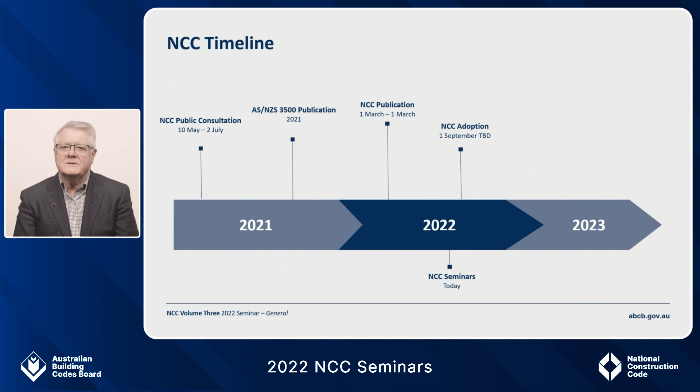Hopefully you all know that the 2022 PCA has already been published in preview mode and is available on the ABCB website. If you haven't already, jump on the website today and download a free copy. This preview has been released early to allow industry to become familiar with the changes ahead of the adoption of NCC. And of course, these seminar sessions are also intended to assist industry to become familiar with the changes to the NCC. The 2022 edition of the NCC is the biggest and most comprehensive update since inception.

And, in fact, there are still a couple of big decisions to be finalised. The main one is a decision on the proposed changes to residential energy efficiency. That decision is expected to be made by the building ministers before the end of August. We recognise the challenge that presents with the scheduled commencement of the NCC on 1 September.

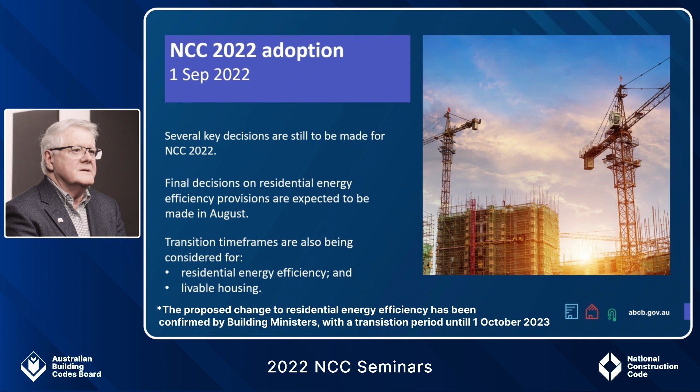We understand that the building ministers will also be considering transition arrangements that will delay the adoption of those provisions, and we have recommended that the adoption of the NCC should not be any earlier than October 1. As soon as we have more information and the building ministers have made a decision, we will let you know by sharing across our networks as widely as we can.

The first change I should mention is a change to the structure and the numbering of the NCC provisions. The NCC has a completely new referencing system for 2022 as part of our digitisation strategy for the NCC. The old referencing system wasn't machine readable or consistent across all volumes, so to enable digitisation across the three codes, the referencing system had to be updated.

Whilst this isn't a drastic change to the PCA, which moved towards this approach in the previous edition, this is a big numbering change for the BCA, and as I indicated, will bring all three volumes of the NCC into a consistent numbering structure. If you use the BCA for areas of work such as roofing, gutters and downpipes, you'll see some big changes here.

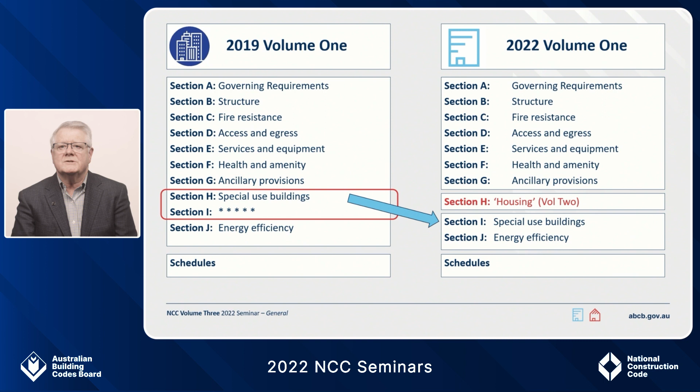When looking at Volume 1, there has not been a huge change. In fact, the only real change at this level for 2022 is that the special use buildings gets bumped into Section I, which leaves Section H empty for a housing section, which is contained in Volume 2. More on that in a moment. For Volume 2, things start to really change when you drill down into the parts.

For NCC 2022, the acceptable construction practice in Section 3 is picked up and moved into a new reference document, the Housing Provisions Standard. Think of this as being like a reference standard. It's not in the NCC, but is called up by the NCC. It's not our first reference document. We already have the three ABCB reference standards, such as the standard for construction in flood hazard areas.

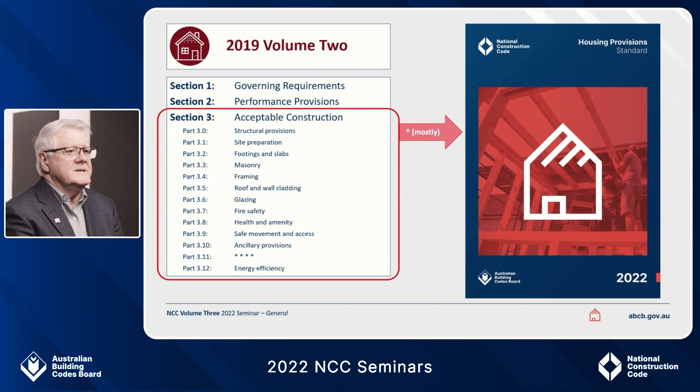So the idea of an ABCB standard isn't new, though this is our biggest move in relation to Volume 2. The numbering is broken into four key elements to indicate what area of the code you are looking at and the type of provision. In this example, you will see that the B indicates the section, B being the water services section of the PCA. The 1 indicates that it's part 1 of the section, which specifically covers cold water services.

The P indicates that it's a performance requirement, or if it was a D, it would indicate that it was a deemed to satisfy provision. And the last number indicates that it's the first clause in the provision. In this example, Performance Requirement 1, which is for cold water supplies.

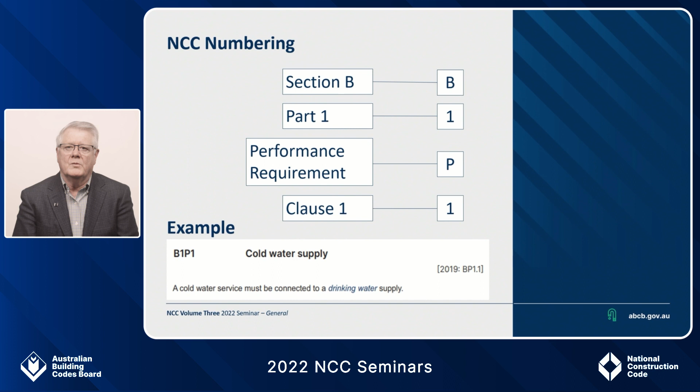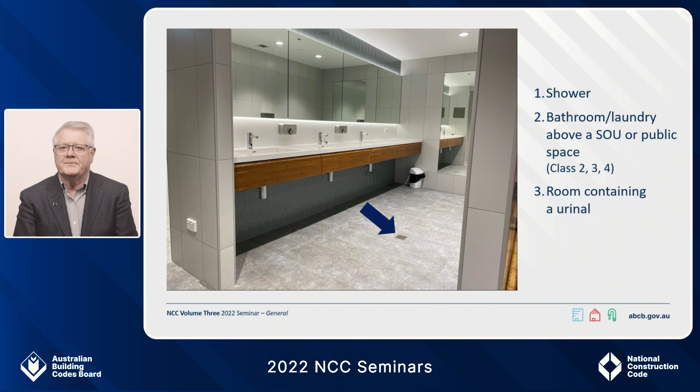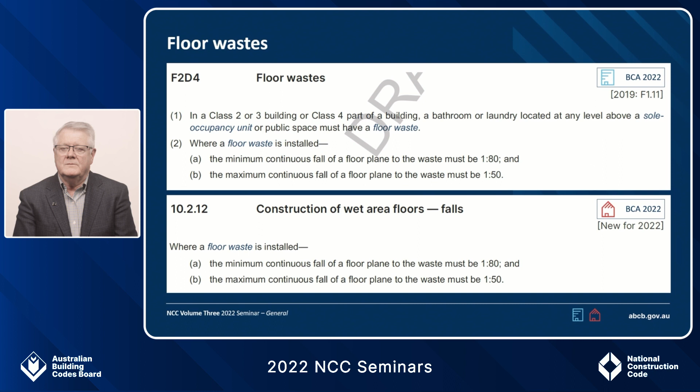After some major changes for commercial buildings in NCC 2019, building ministers decided the ABCB should develop enhanced energy efficiency provisions for residential buildings. This will be the first major stringency increase for residential energy efficiency in the NCC since 2010. Besides improvements for building envelopes, a whole of home approach will be introduced in the NCC 2022.

The whole of home approach is a holistic approach to assess the energy performance of a building and covers all of the key appliances as well as the building envelope. A key point for the plumbing sector in relation to these energy efficiency requirements is that they won't change current work practices for plumbers, but may be used to inform which water heaters are selected through considerations of the wider house design.

The NCC 2022 will be reducing the allowable lead content in plumbing products. Products which contain copper alloys and are intended for use in contact with drinking water will be required to have a weighted average lead content of no more than 0.25%. NCC 2022 will specify new requirements and will outline the transition period for this change, which I'll show you on the next slide. There are a few reasons for this change.

One consideration was for international practices. Australia is a small market on the global scale, and consideration was given to what is happening internationally to ensure that Australia does not create more stringent requirements than other countries. If this happened, this requirement would become a barrier to trade and the importation of plumbing products. As such, this change will align with the levels set by other countries, such as the USA and Canada.

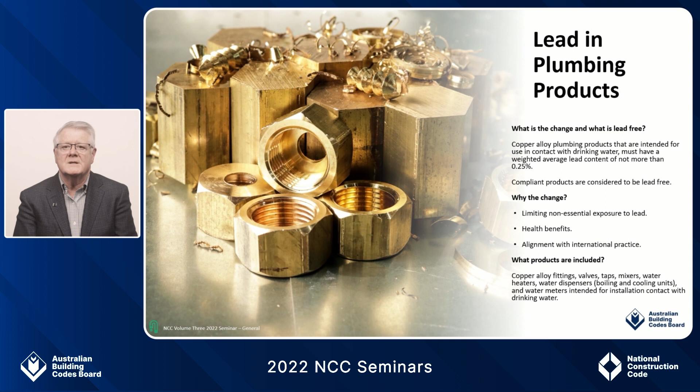The application of the lead-free requirements is limited to products containing copper alloy and are in contact with the drinking water. These products include items such as fittings, valves, mixers, water heaters, water dispensers, and water meters. I mentioned before that there will be a transition timeframe for the lead-free plumbing products. There will be a 3-year transition period to allow manufacturers and suppliers time to ensure that there is sufficient lead-free plumbing products in the market by the 1st of September 2025.

For now, there is nothing that needs to be done by the installer, but beyond the 1st of September in 2025, only lead-free plumbing products will be authorised for installation and existing products will no longer be able to be used. This is a big change for the industry, so we will talk more about this transition later on.

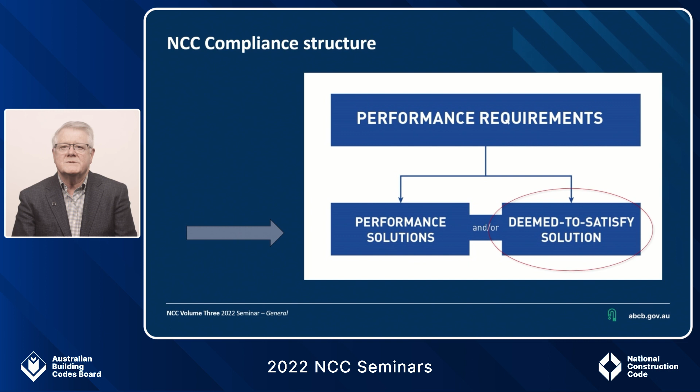So let's move into the compliance structure of the PCA. As we work our way through the seminar today, we will provide an indicator of where the requirements sit within the compliance structure of the PCA. I will take you through the detail of the changes to the PCA in 2022, which you can use to demonstrate compliance with these performance requirements. There are a number of changes to the deemed to satisfy provisions, and I will introduce to you a few new verification methods, which can also be used to demonstrate compliance through a performance solution.

The deemed to satisfy provisions are prescriptive, like a recipe book. They tell you what and in which location things must be done. They include materials, components, design factors, and construction methods that, if used, are deemed to meet the performance requirements, hence the term deemed to satisfy. As the slide indicates, it is important to reiterate that to meet the performance requirements of the PCA, you can use a performance solution, a DTS, or a mix of both. If using a performance solution or a mix of performance solution and deemed to satisfy provision, the proposed solution would generally require local government consent prior to the work being carried out.

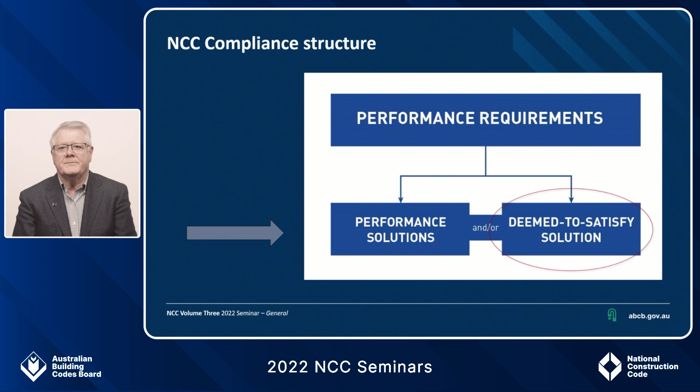Now we have been through the changes to the performance requirements, we will talk a little bit about performance solutions. It is important to remember that if you are using a deemed to satisfy solution, such as an AS/NZS 3500, you do not need to demonstrate compliance with the performance requirements as the solution being used has already been deemed to meet this requirement, hence the name. NCC 2022 outlines the required processes for developing a performance solution. This requires project stakeholders to collaborate and develop an agreed pathway for the design process to follow. This process will ensure that the solution produces an acceptable outcome.